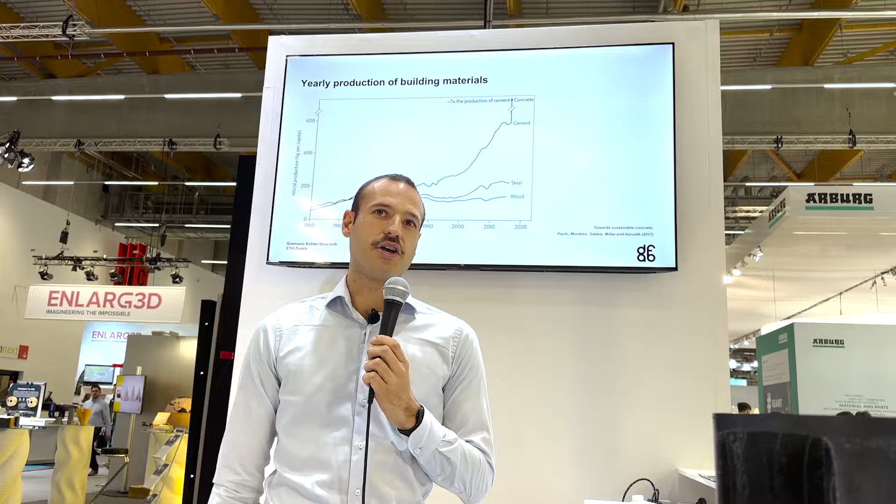So concrete is the most used material in the world. The only material that's used more is water. So it's the most used construction material. It has a massive impact on the planet, and it really accounted for the growth of our civilization, and it brought the built environment to where it is at this point. You can see the amounts that are being produced. It's around 30 billion tons per year, and this vastly outnumbers, for example, the amount of steel that's being produced or the amount of timber that's used in the construction industry.

That's also why it's no wonder that concrete has a big impact on greenhouse gas emissions. This is particularly because of the production of cement. In Europe, for example, cement is responsible for 5% of CO2 emissions, whereas worldwide, it's actually 8% of CO2 emissions that are caused by cement. So very vast amounts. If we want to transition to a more sustainable built environment, it's very important we address this challenge.

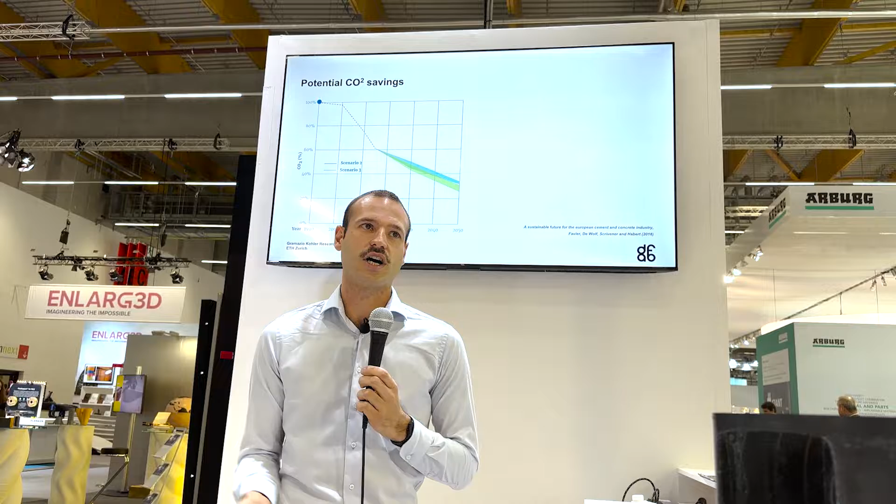There's already many people that have looked into strategies that we can use to reduce the carbon footprint of the construction industry, specifically in terms of concrete. And they found that we can actually reduce the impact that concrete has on the construction industry by around 70% by 2050, which would be a good path towards carbon neutrality as well. So how can we do that?

Concrete is composed of cement, or a binder that's usually cement, aggregates, and water. On the first scale, you have the clinker, which is the base material for the cement. What we can do here is have more efficient production processes, for example, using renewable resources. Then we can put less clinker in our cement, and less cement in our concrete. All these three aspects have to do with the material. Material scientists are working very hard on creating more sustainable concretes that have less carbon impact per cubic meter of concrete.

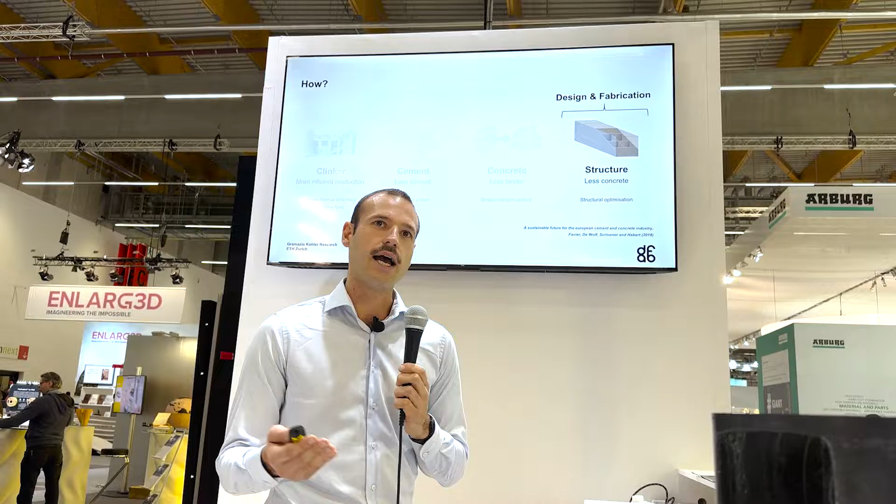But on the other hand, what we can also do is use less concrete in our structures. This is a problem that we can address through the design and fabrication of structures within architecture. And as an architect, this is where I want to make a contribution to this field. We're working together with our colleagues in material science that are advancing new concrete mixtures, but we believe that we can really reduce the amount of concrete that we use for structural buildings and still have similar performance.

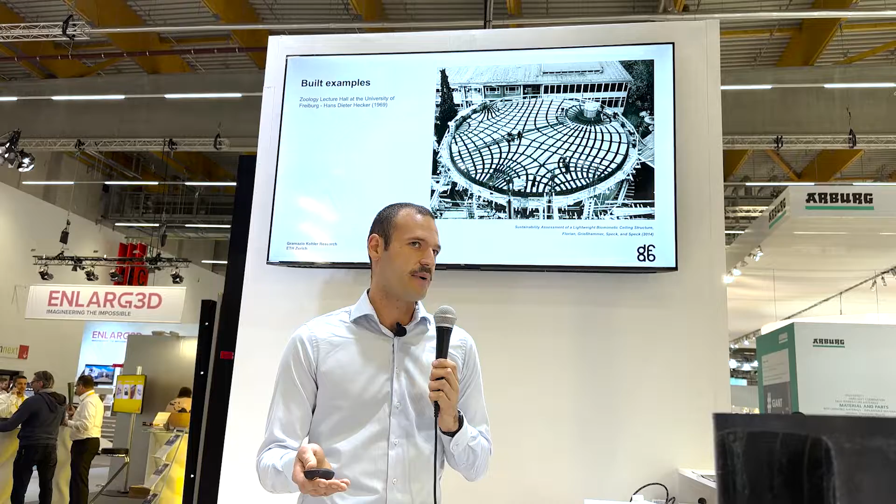This is also not a new idea. In the 20th century, many people already explored this idea of more structurally efficient concrete structures. The only thing that was different at this time is that labor was very cheap and materials were expensive. So it made sense to make structures such as this beautiful ribbed slab in Germany, because you could reduce the amount of concrete and steel you use, although you had a bit more cost for the labor. It was still worth it from an economical perspective.

However, if you look at the cost division of this particular roof structure, you can see that 80% of the cost was actually made up by the formwork. So not the final materials that go into the structure, not the structural concrete, not the steel, just the temporary scaffolding to hold the concrete in place while it cures. So this is really the element that restricts us in building these kinds of non-standard structures.

What we are doing at ETH Zurich is trying to tackle this problem of inefficiencies in formwork by using 3D printing to produce the formwork. We do this by combining robotic fused deposition modeling 3D printing with a special type of casting that we've developed at ETH Zurich called set-on-demand casting.

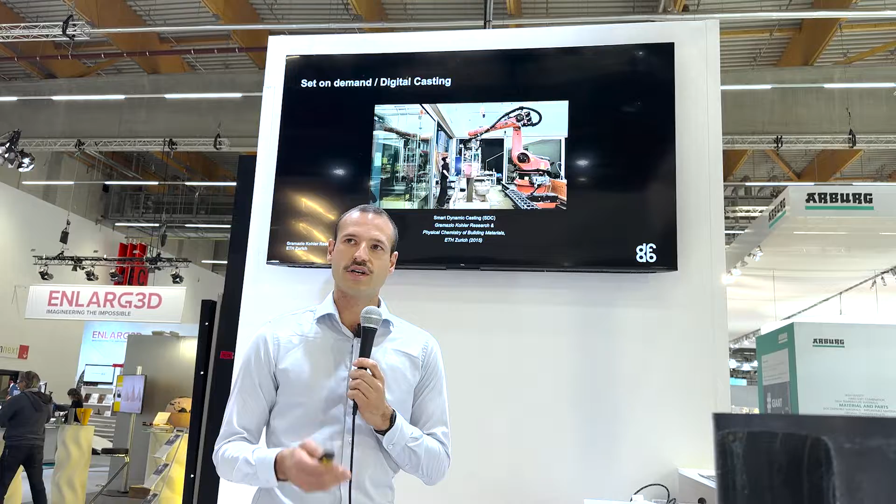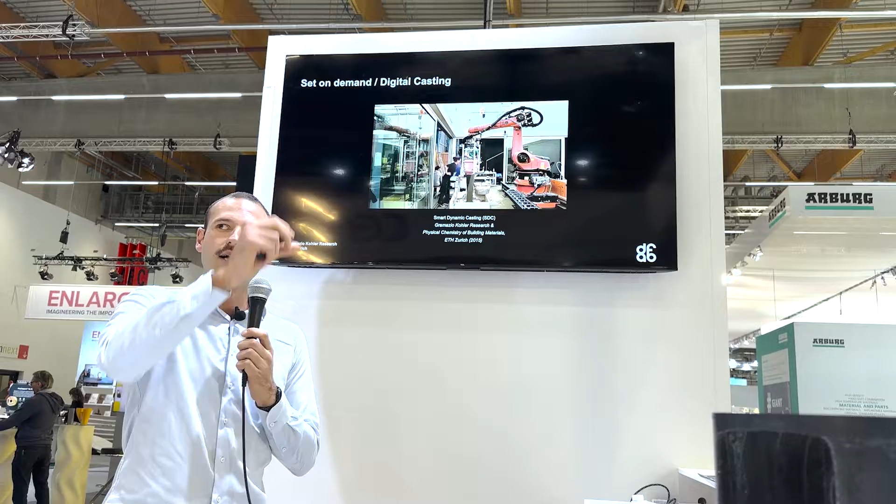Set-on-demand casting was developed in an earlier research project at ETH Zurich. What you can see here is a column made with a formwork that is robotically moved up vertically. The formwork is much smaller than the actual structure being made. The concrete is fed in from the top, and then it hardens quickly, and by the time it exits at the bottom, it can already sustain its own weight.

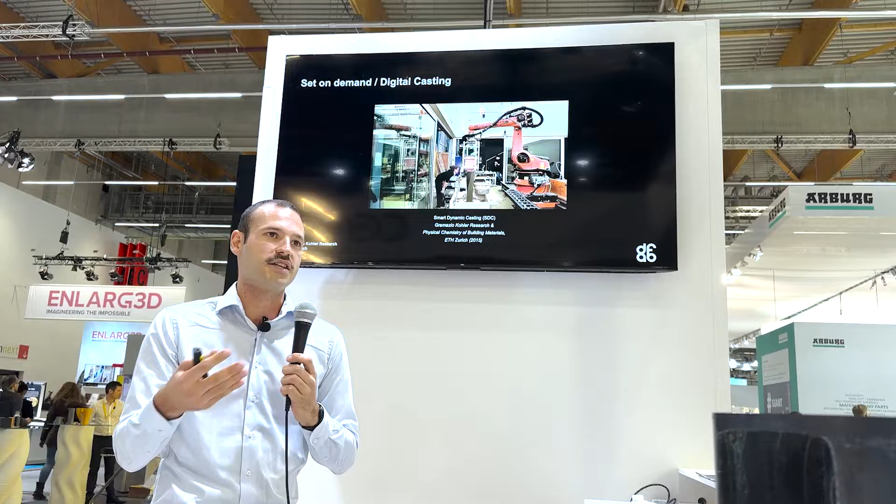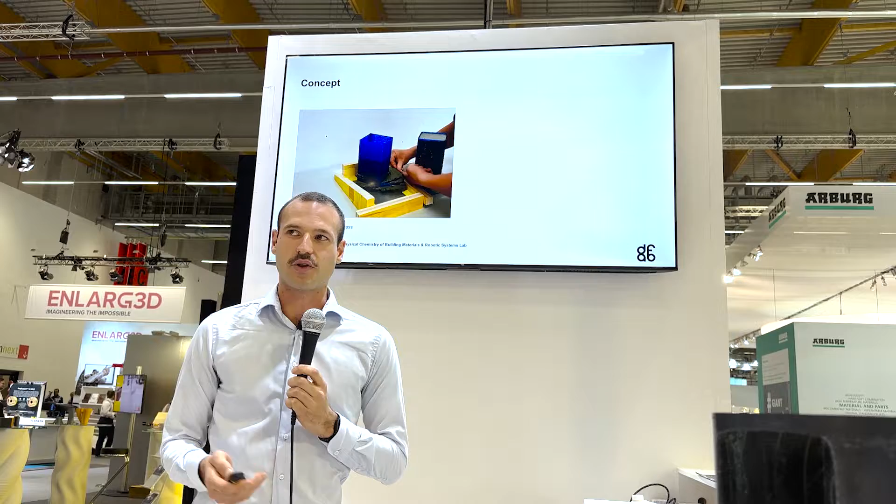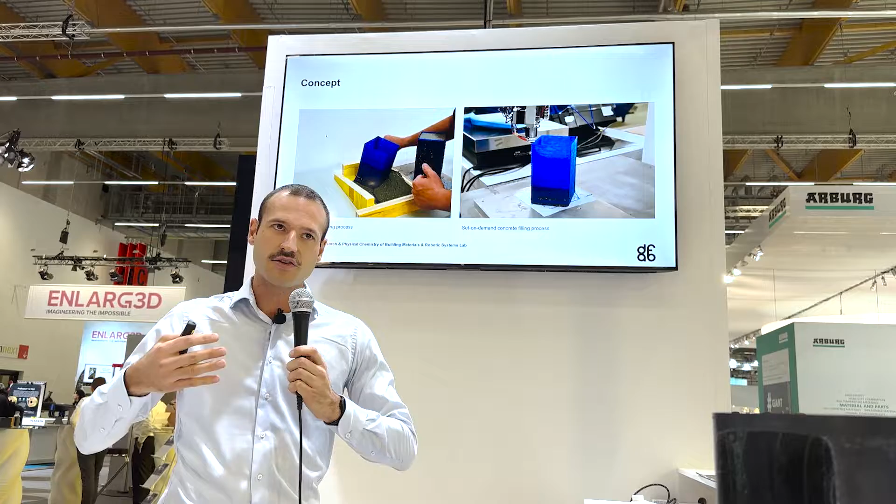You print a thin mold using a small printer, cast in the concrete, and it breaks because of the pressure of the concrete. However, if we then apply the same strategy, the set-on-demand casting strategy that was used previously for this column, and we cast in the concrete, in this case while the structure is being printed, and it is already hydrating, so the pressure on the formwork is limited, we can actually use these very thin 3D printed molds.

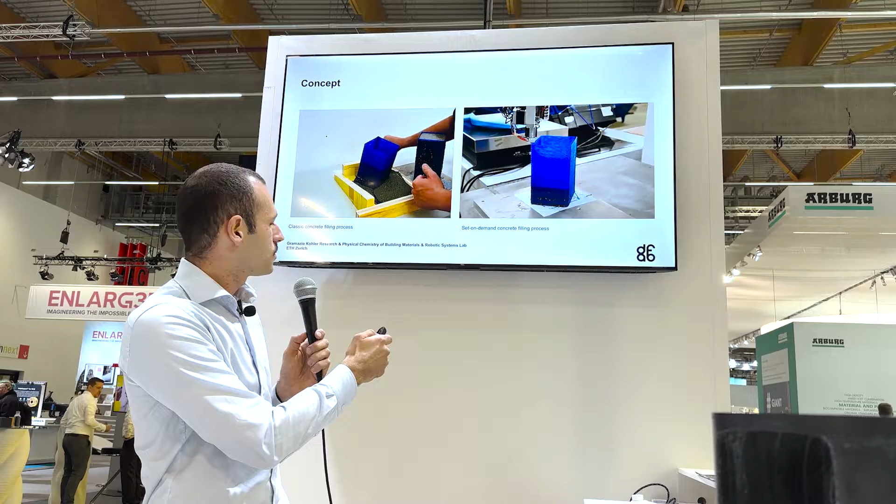Sorry, I just need to... Sorry, let me try to display the video.

Okay, anyway, so you can see here that the robotic arm is printing the thin formwork, and at the same time we're casting in the concrete. And you can see also here that we have, for example, these voids that we leave in that will be used later for reinforcement of the structures. So you can see this is a very thin mold.

It's only 1.5 millimeter thin in this case, PETG material. That was printed in the early stages of research, so just our own self-built filament printer. This is then, for example, a structure that was made during this project. This was actually student work, and the students wanted to explore what are really the limitations or the possibilities that we can have using 3D printed formwork. So let's say, how crazy can we go in concrete structures?

And I think these results really show something that is almost impossible to fabricate in any other way, with milled formwork or any other method. Of course, this is not an optimized structure, right? This is not an efficient way to make a column, but that was not the point of this project. It was more to show how far we can go.

So in particular, the objectives of our research are to make it possible to fabricate these kinds of material efficient structures in a better way than we have now, so that we can reduce the amount of concrete that we use for structural building components, with the minimization of formwork waste, of course. And as well, we want to integrate steel reinforcement into the concrete structures because this is critical for them to be code compliant and actually applicable in the construction industry.

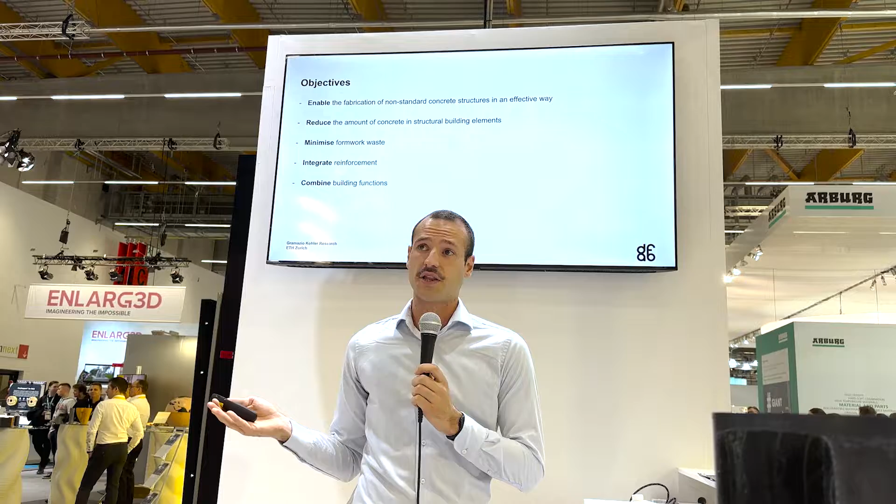Then there's also another possibility that 3D printing offers, to combine multiple building functions in the same element by, for example, leaving voids. So I'll now show a couple of projects that we've done through the years. This is the first project called the Future Tree. It was done for a Swiss engineering firm that wanted to have an extension of their office building.

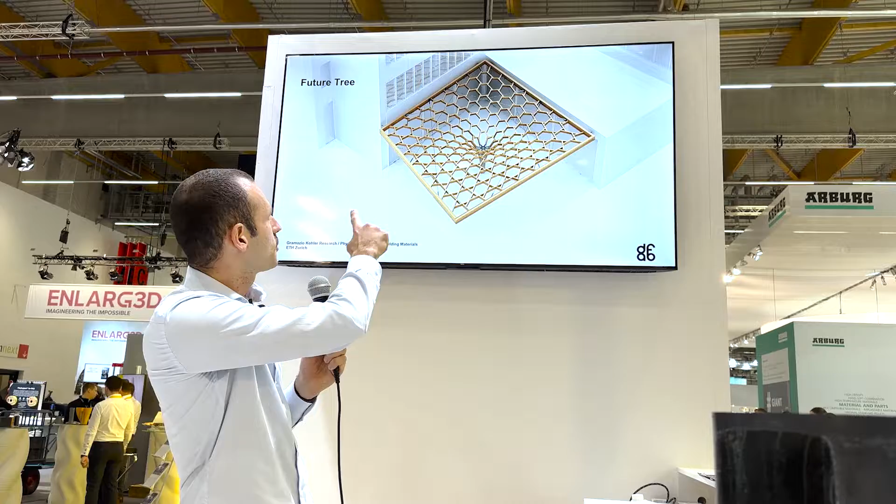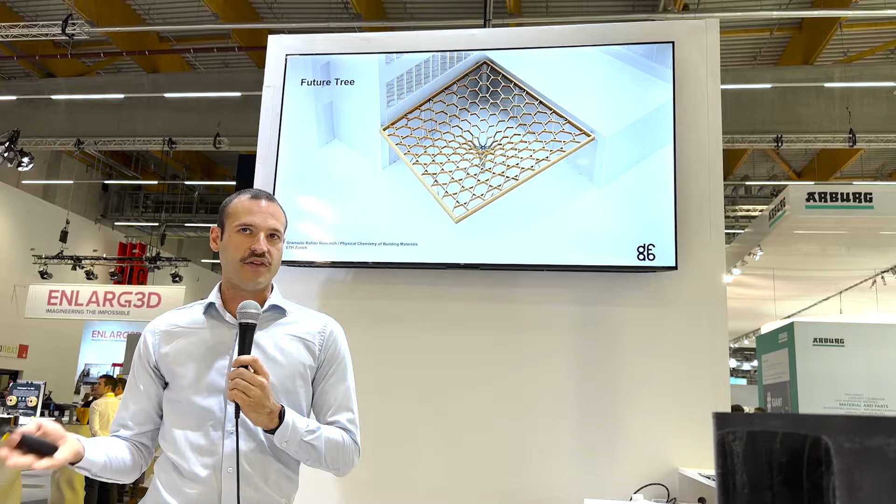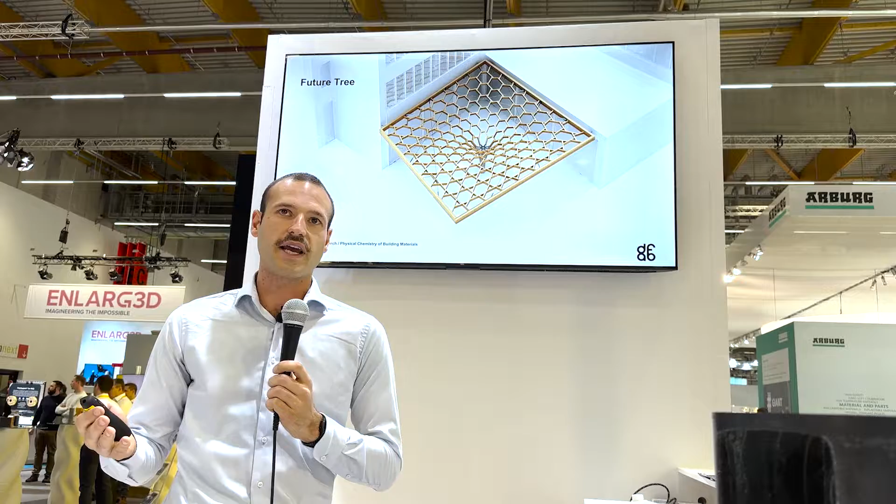You can see here in the top their office building. They were going to extend it, and they wanted to make some kind of eye-catching canopy in their courtyard, also a bit as a pilot project for digital planning and digital fabrication technologies. So what we did is we combined two research projects from our group. On the one hand, a robotically assembled timber roof structure. And on the other hand, a concrete column that was made using 3D printed formwork.

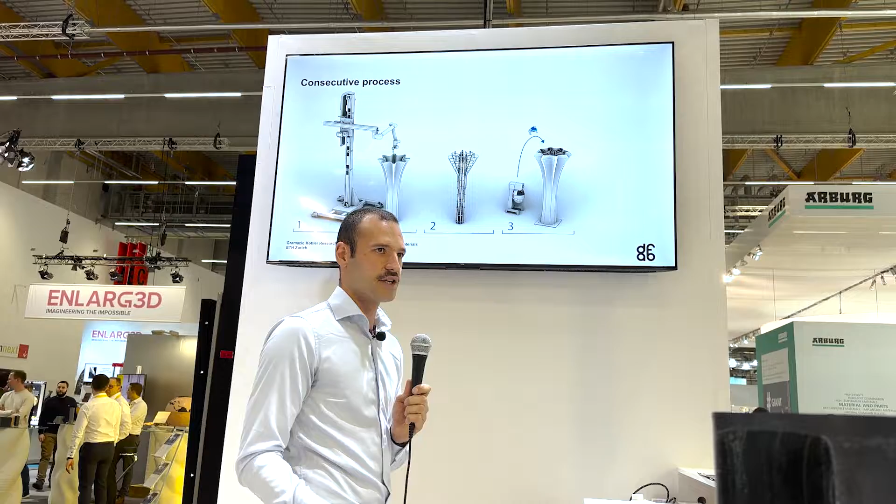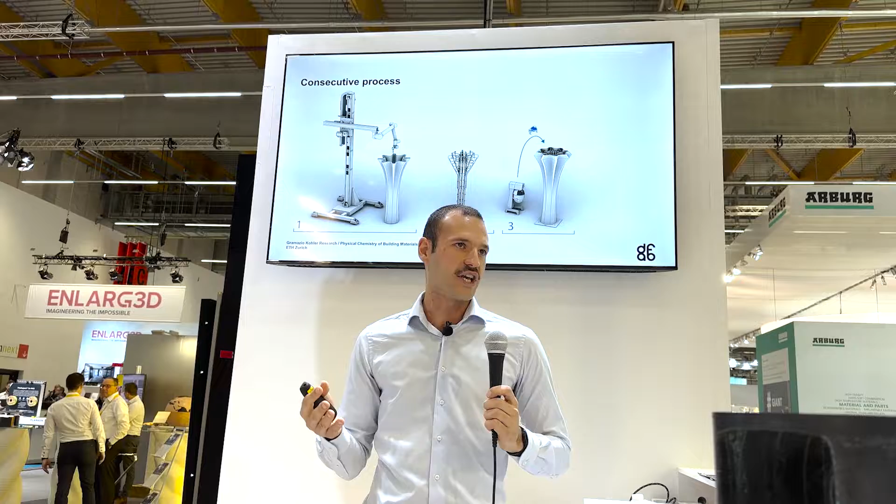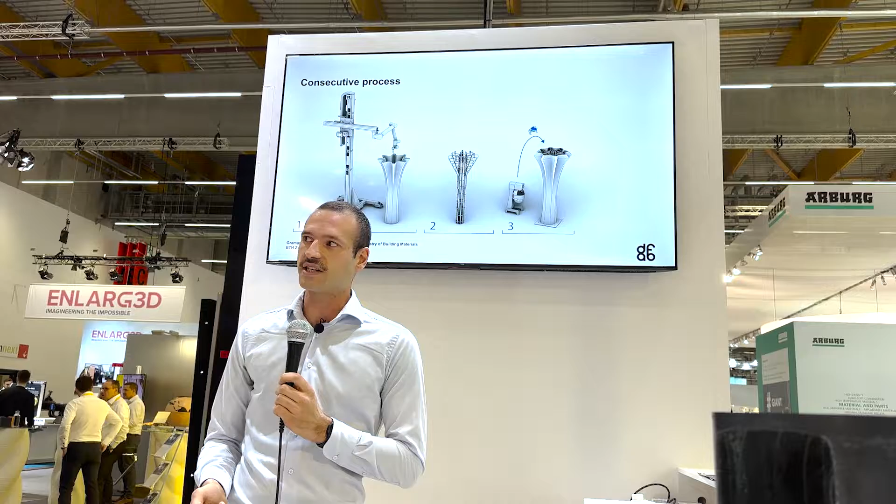So for this column, we had to rethink the fabrication process a little bit. In this case, we did not cast the concrete and print the formwork at the same time, but instead we went for a more traditional consecutive process, as is more typical in the construction industry, where the robotic arm prints the formwork, we prefabricate the reinforcement, and then the concrete is cast using the set-on-demand cast concrete. So still slowly filling up the concrete to avoid it breaking the formwork.

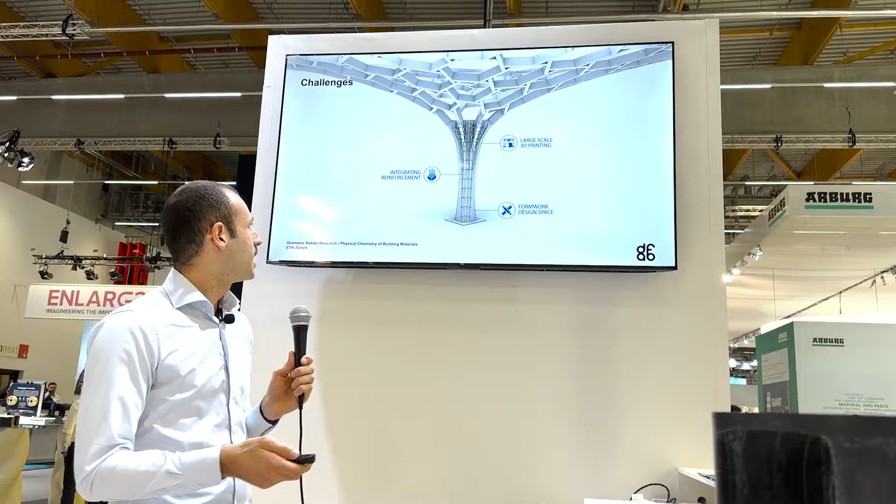So quite a lot of challenges that we had to solve, because this was really the first structural application. It also had to be completely code compliant for a real building project. So we had to fix the large-scale 3D printing, which back in 2019 was not really something we had completely under control, integrate reinforcement, and really investigate how far we can push the design of the structure. So I'll just fly over them a bit.

In terms of reinforcement, we had to use standard reinforcement. This meant we had to change the shape of the structure a bit to fit an actual reinforcement cage that we could post-place after printing of the formwork. So rationalize the design in that sense.

Then in terms of large-scale 3D printing, at this point we were using a filament printer that was just a self-built, quite low-tech extruder. And we were printing it with a diameter of 1 meter, this crown, the sort of top section of the column.

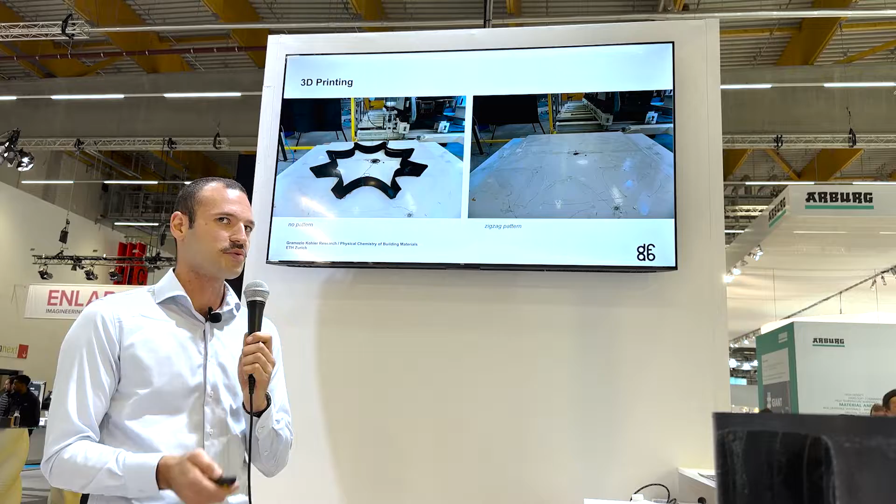And what we found is that we had a lot of problems with layer delamination during our first tests. But then we figured out that we could actually apply some kind of patterns on the structure. For example, in this case, a zigzag pattern or more of a diamond pattern. And in this case, we could reduce the delamination because the filament always tries to shrink in the direction of the layer. And in this case, these high internal stresses within the layer could be avoided. And we could make it feasible using this particular printing setup that we had.

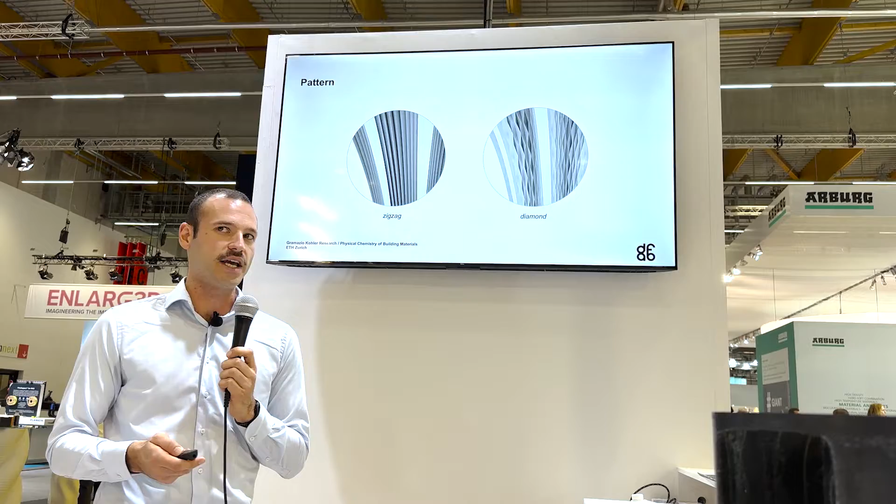So we tested multiple patterns. We kind of ended up with this diamond pattern that also gave the formwork a little bit more stiffness and is really reflected back into the concrete. So this is then the final design that we came up with. So we had a steel plate on the top and on the bottom to connect to the foundation, the reinforcement cage, also integrated drainage going through the column.

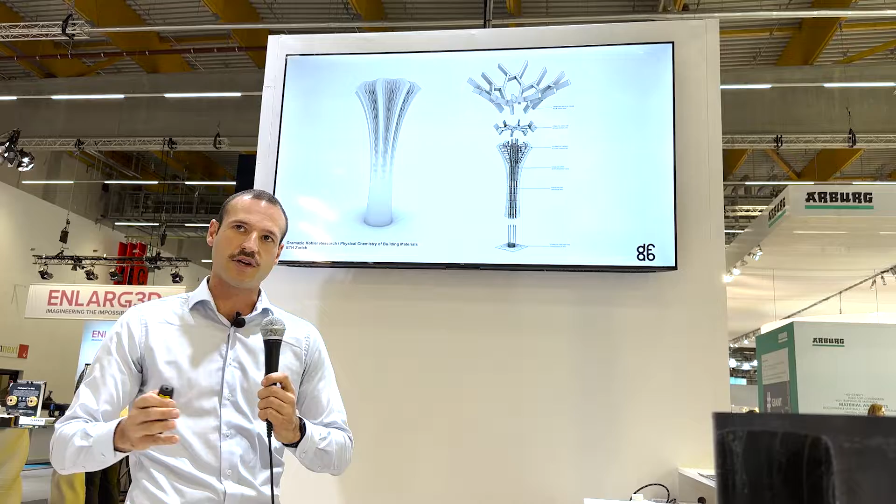And you can see that, for example, the pattern is not very visible at the bottom, but it is very visible at the top. This is because in the bottom it was not really needed because this was easy to print because of the small diameter. But at the top this was necessary, so that's why we turned this fabrication aspect also into an aesthetic feature of the design. So here you can see the column being printed in our lab.

So at this moment this still took, I think, 26 hours to print it out of PETG with a layer height of 1 millimeter only and a layer width of 1.5 millimeter. Then put in the prefabricated reinforcement cage and then cast it using set-on-demand casting. So in this case still by hand, manually casting in the concrete layer by layer to avoid it from breaking. Then we peel off the formwork. And then we can also recycle it. This is something that I get back to later.

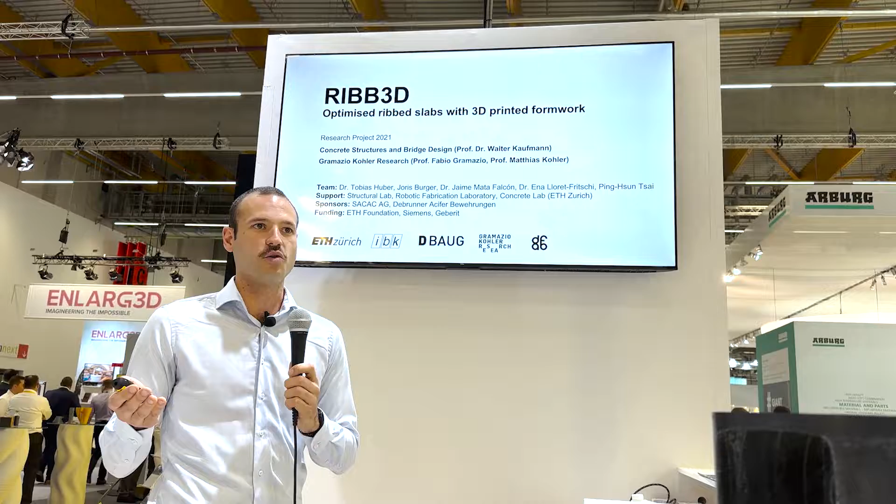So that was an interesting first finding, but of course what we started with were columns because they were relatively easy to print. These kind of vertical structures lend themselves quite well to FDM 3D printing, but it's not really where the material savings are. So in the beginning I said what we actually want to do is reduce the amount of concrete that we need for structural building components, and in terms of columns we have a bit less potential there because they're already efficient at transferring the compressive forces.

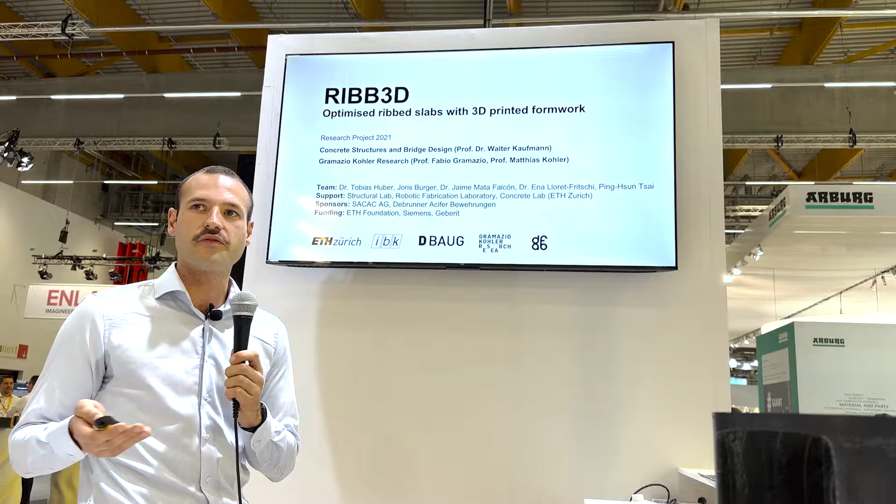However, in floor slabs, there's a lot of potential to optimize them. And we wanted to see, okay, can we use a similar printing and fabrication approach to make optimized floor slabs and see how much we can reduce the amount of concrete. So we came up with a design that is inspired by some of the famous designs from the 20th century. Nervi and Hecker and Maillart also came up with similar ribbed systems that really aim to place structural ribs where you actually need them in terms of the force flow of the floor slab, and in any other place just leave the concrete as thin as possible.

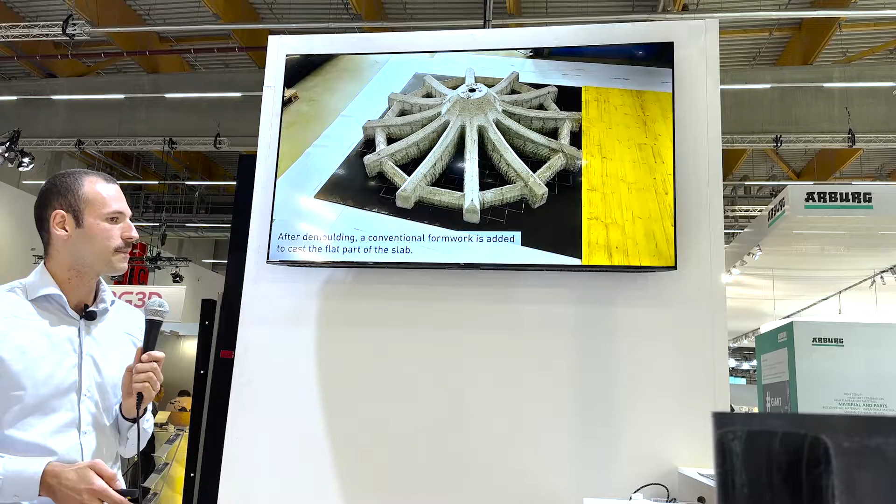So yeah, the formwork was printed. I think it took, in this case, 24 hours to print the entire formwork. And it was cast in 2 casting steps. So you saw before that the ribs were printed. So these are the main structural elements. And then in the second step, we cast the flat slab that's only 8 centimeters thin. And this is just to provide the surface to, in the end, walk on, to provide the floor.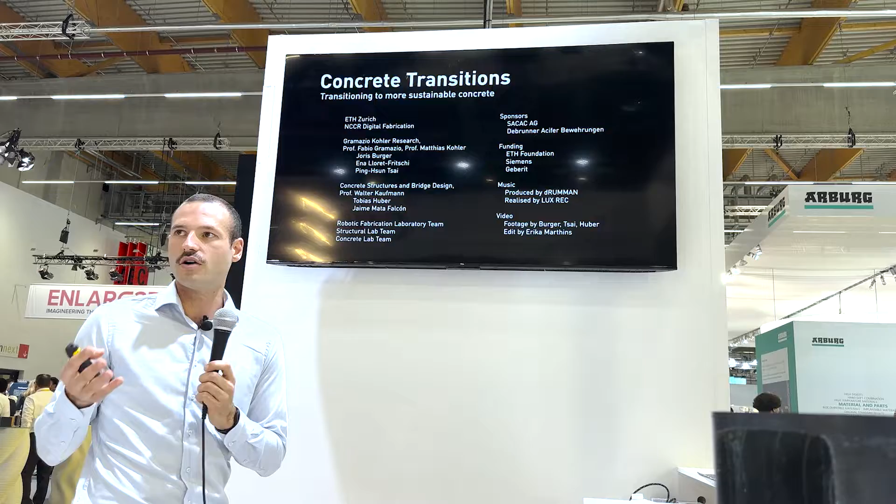You saw also that we made another element, a flat slab, and we compared the two to see, okay, are our assumptions on these 40% material savings indeed valid? And we found that actually we could achieve a similar structural performance with the optimized slab with 40% less material. So our assumptions were validated in this demonstrator, which we also designed to be compliant to building codes again, so it had the proper reinforcement and everything integrated into the building element.

Of course, it was still a prototype, and it was just a single element that we tested. That's why for our most recent project, we worked together with the students from our postgraduate master at ETH, the Master of Advanced Studies in Digital Fabrication. And we gave the 17 postgraduate students the task: okay, we have developed this technology over the last 4 years. Now we want to build a real building structure with it. What can you design to come up with something expressive, innovative, as well as sustainable?

So we got a site for this project, which was at the Vitra Museum in Weil am Rhein in Germany. On the campus, there's already many examples of very interesting architectural pieces. It's a bit of a playground for architects somehow. We were chosen to put the pavilion before the entrance as part of the Hello Robot exhibition. So it's an exhibition about robots in general, in media, in whatever, and we represent the robots in construction in this case. So the students came up with a design concept, and we gave them some constraints, of course, because the project was quite limited in time.

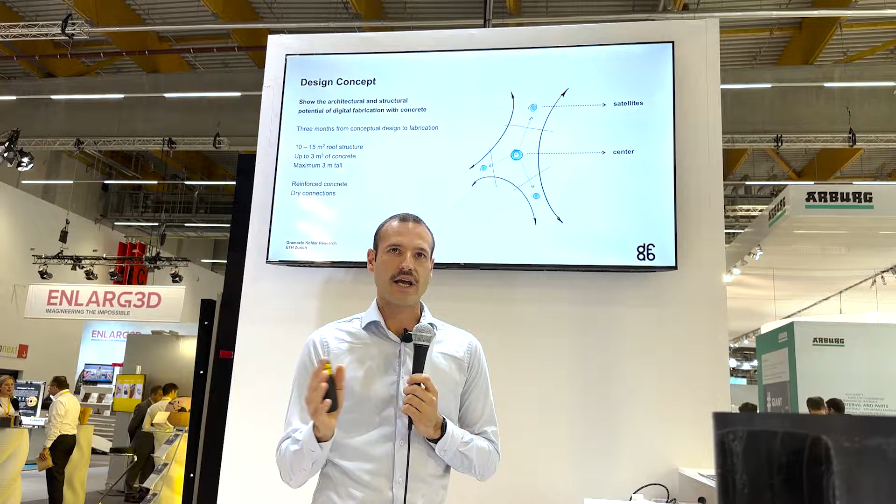We only had 3 months to go from initial concept to complete fabrication of all of the building elements with this group of students. So what we gave them as a brief, we said we want a roof structure around 10 to 15 square meters. You can have around 3 cubic meters of concrete. It should be maximum around 3 meters tall, and it has to be reinforced concrete, again, according to building codes. And we need dry connections between the elements because it needs to be assemblable and disassemblable after the exhibition is finished.

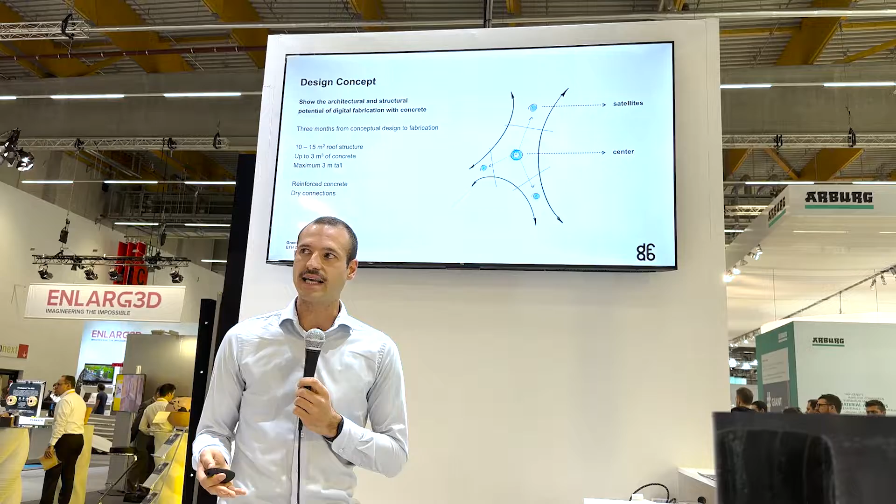So the typology that we came up with was that we had a center column and slab pair, and around that 3 satellite column and slab elements to also ease the assembly on the construction site. So this is the vision that they had for it. You can see the center column and then a slab element on top, and then 3 other column and slab pairs next to it. Again, following this method of having ribs where you need them, and only a very thin 6 centimeter slab in this case to just create the roof.

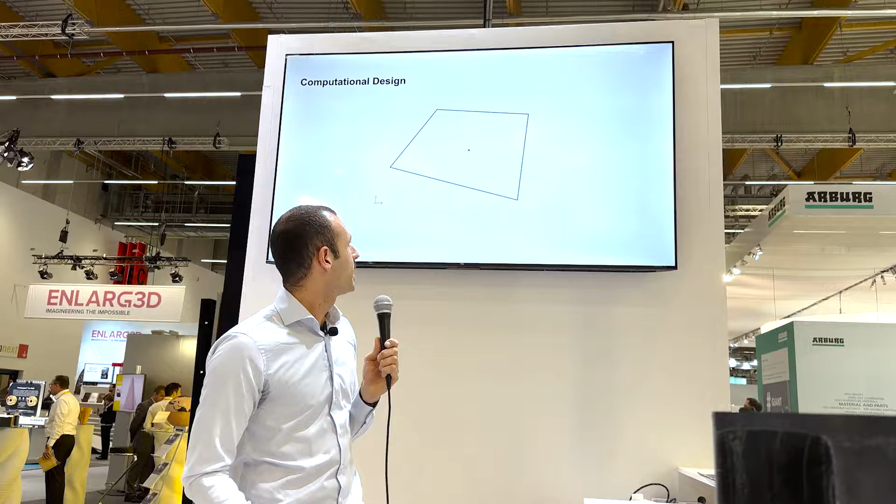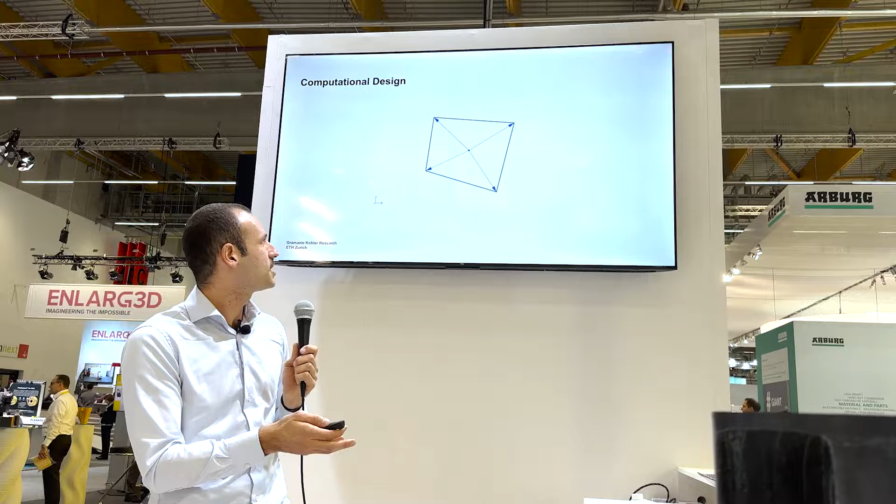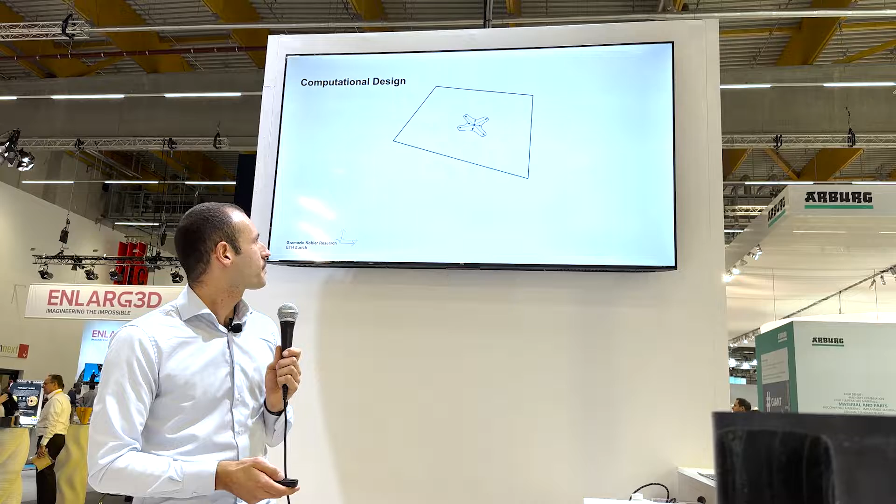So the students also adopted a computational design workflow to make the shape of the pavilion, where, for example, first you generate the outline of the pavilion, and then you have each slab element. From the middle of the slab element, you create the vectors that go towards the corners. And at this point the shape can still change, so depending on the angles it becomes either 3 or 4 ribs. And from that the bisecting vectors are formed, which then form the shape of the column. And then the shape of the column is extruded down to form the capital shape of the floor slab.

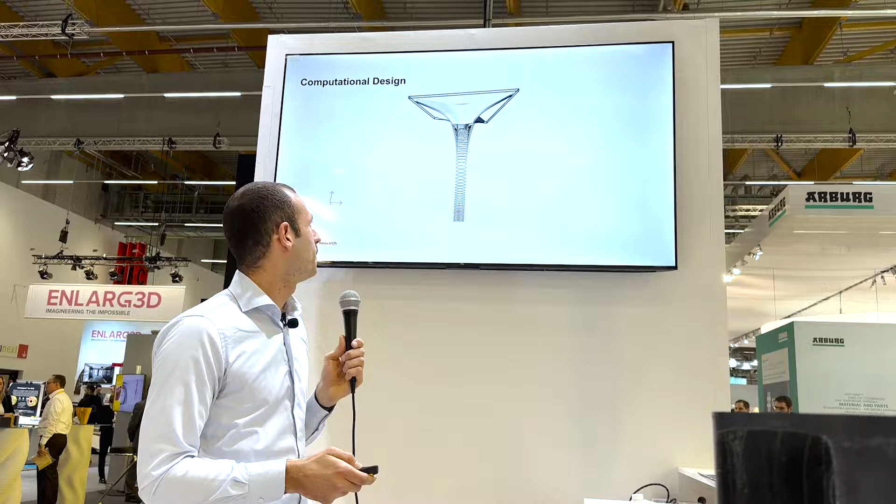And then by defining the rib sections, here in collaboration with our engineers to make sure that everything is structurally feasible for these particular spans, we could then design the structure and the column, and also the reinforcement that went with it in this computational design.

So there were still many iterations throughout this whole project, and what's interesting about this parametric workflow is that you can really still change the design right until the moment before production without having to manually redraw the components of the structure. So also, of course, 3D printing allows for creating some interesting patterns.

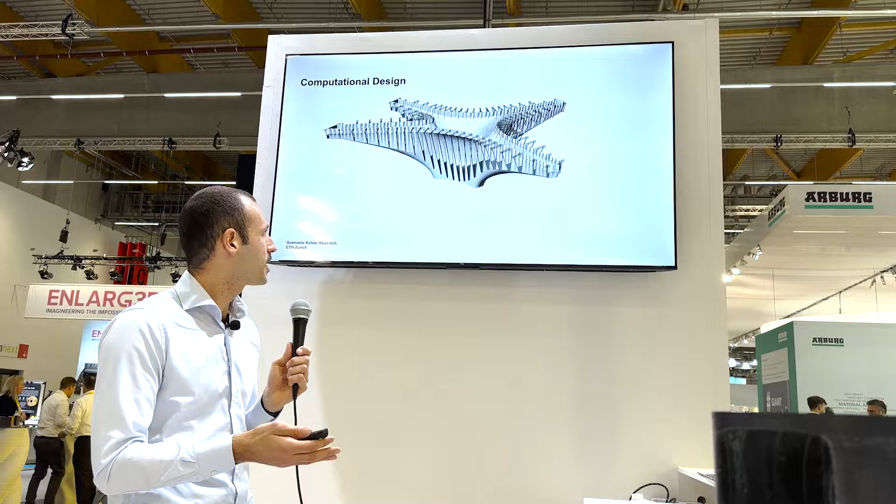In this case, they were really just more guided by aesthetics and by having extra visual elements connected to the column. And then the geometry, again, like in the ribbed floor slab project, was automatically generated, everything programmed, what kind of distance we need for the stiffening ribs, what sort of height, what sort of spacing, and making the fabrication data. And this then really was a completely functional script that could still change until right the moment before production.

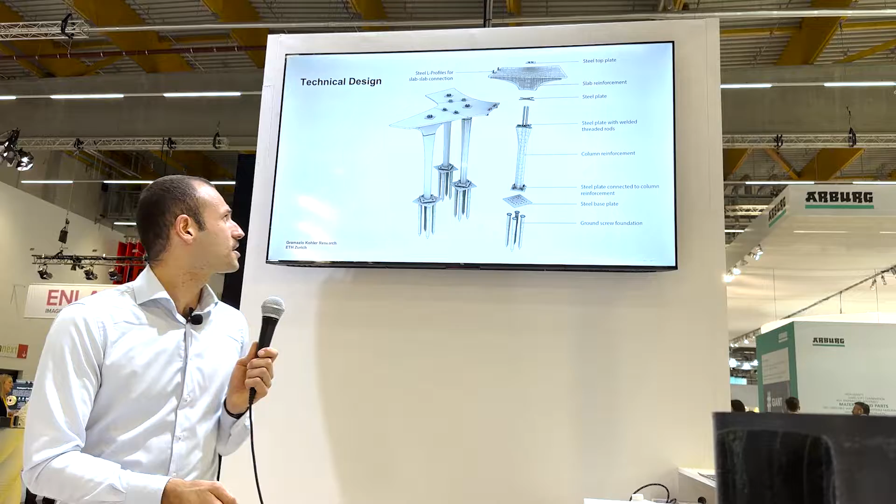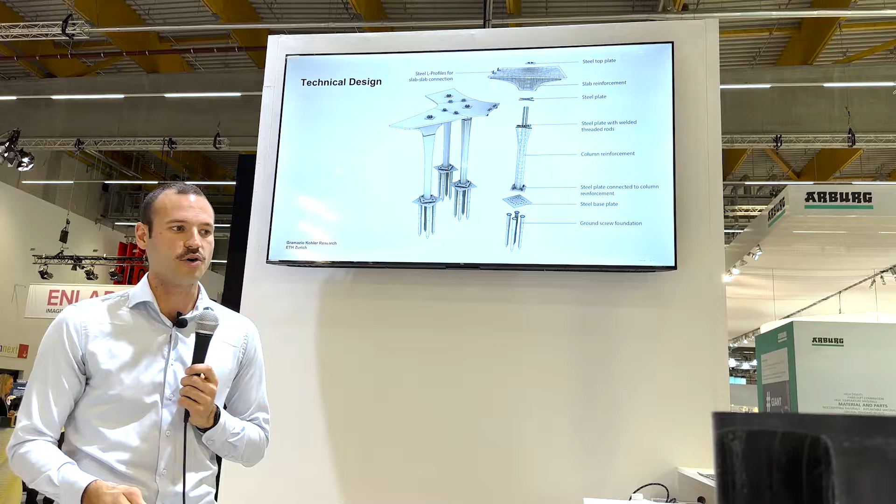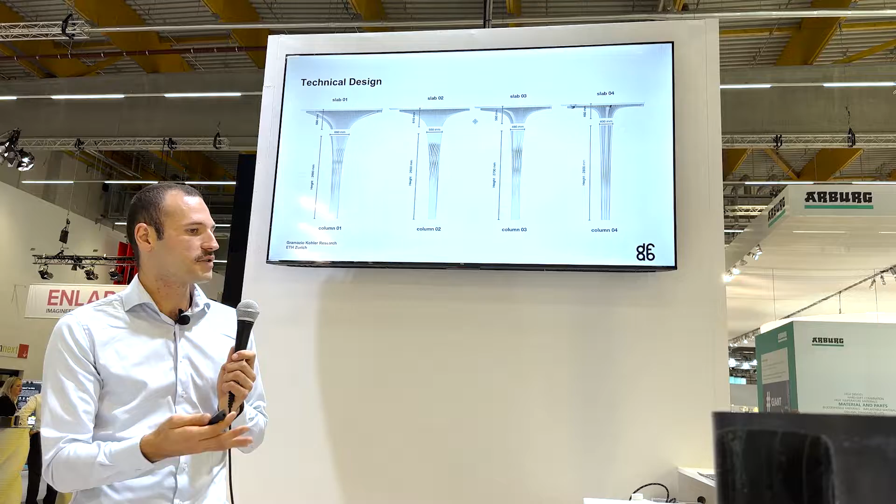Here you can see the technical details of the project. So we had a column cast onto a steel plate that was connected with another steel plate and then put into the ground with ground screws, which is a more reversible foundation method. And then it's connected to the roof with threaded rods that stick from the column through to the floor slab. So we created 4 columns, 4 slabs, each a little bit different.

And also what we did for this project is we recycled formwork from a previous project. So it's something that I said before. Throughout the project we always said this is a possibility with 3D printed formwork. But now what we actually did is we took formwork from an old project where we made some furniture actually from concrete. We cleaned the formwork that we took off a little bit. We shredded it to granulate, then regranulated it, and then 3D printed the regranulated material. So the formwork columns were printed fully from 100% recycled formworks from this previous furniture project.

So this is a little video that shows a bit the design and fabrication process. This is what you saw before, the computational design generation of the structure. So the students first started prototyping in a bit smaller scale with our small extruders to create the shape of the columns. Of course, many tests were also done. What we also integrated in this project was actually automatic casting of concrete. You remember in the first project I showed, the future tree, we actually cast the concrete by hand, but at this point we automated it.

Here you can see again our gantry setup in the lab, printing the formworks. So these are completely recycled, printing the 4-column formworks. So each column was printed in around 6 or 7 hours. They were 3 meters tall or 2.8 meters tall. Again, insert the regular reinforcement. So we had 2 different strategies.

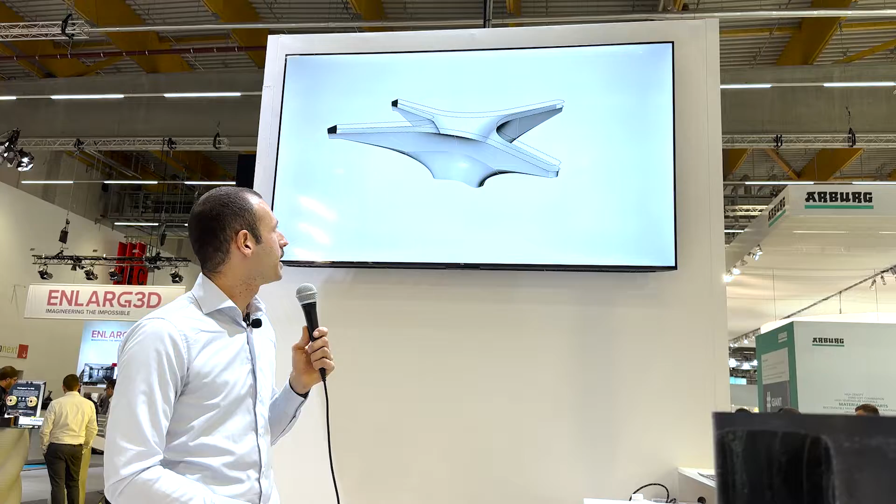On the one hand, we cast the columns with our set-on-demand casting strategy, but in this case we automated it. So you can see here we have another robotic arm that's used with a funnel attachment where accelerating admixtures flow in. So these are the admixtures that make the concrete harden quickly at exactly the time that we need it not to burst the formwork. And this setup can then be used to automatically fill the columns in 1 hour, whereas for a previous project it still took 6 hours to fill the columns because of the hydration of the concrete.

For the floor slabs we had a similar strategy to the rib project that I showed before. Prefabricated reinforcement cages were inserted, and then we had to use some non-planar strategies as well to create the ribs, the cap of the ribs, to make it possible to print that part. Again, they were fabricated upside down, taking 2 casting steps.

And this is then some of the assembly on site at the Vitra Museum. So you see steel plates, columns being placed on the steel plates with a bit of room for adjustment. And you can see the threaded rods sticking out of the columns. That's where the floor slabs will then go on top of. So first placing the center slab, and the ribs of the floor slabs sort of transition into the ribs of the columns,

with then this as a final result that sort of shows the application again of 3D printed formwork in a construction project, of course still on a pavilion scale, but what we hope to say with this is that 3D printed formwork is actually already possible to use in the construction industry. We can already use it for design, to produce structures that are compliant to all of the existing codes and building norms, and we are very happy to also do more projects and really implement this technology in a real construction project instead of in a pavilion, because I think that's where now the next step is. That's where the technology basically needs to go to transition to a more sustainable building culture with concrete.